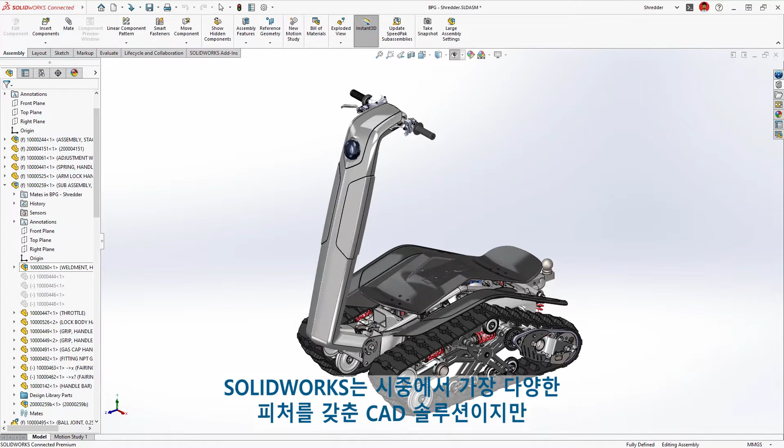SOLIDWORKS is the most feature-rich CAD solution available, but that doesn't mean significant improvements can't be made. In SOLIDWORKS 2023, we focused on expanding the capabilities of existing features to make you more productive.

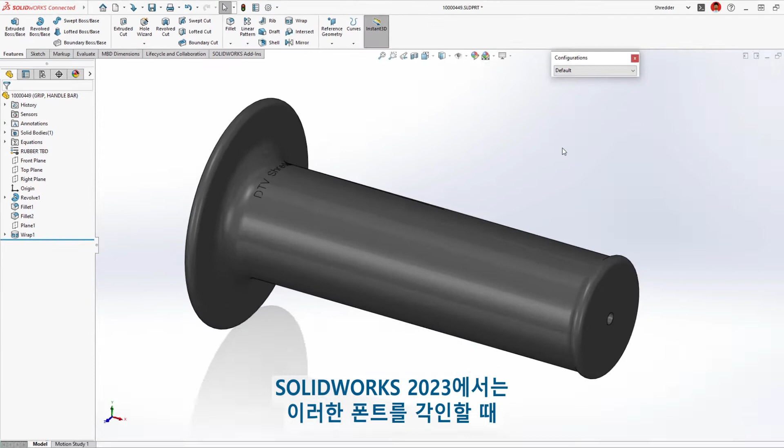Inscribing information such as serial number or model names into cylindrical surfaces is best done with single-line fonts. SOLIDWORKS 2023 allows you to inscribe these fonts using the wrap feature.

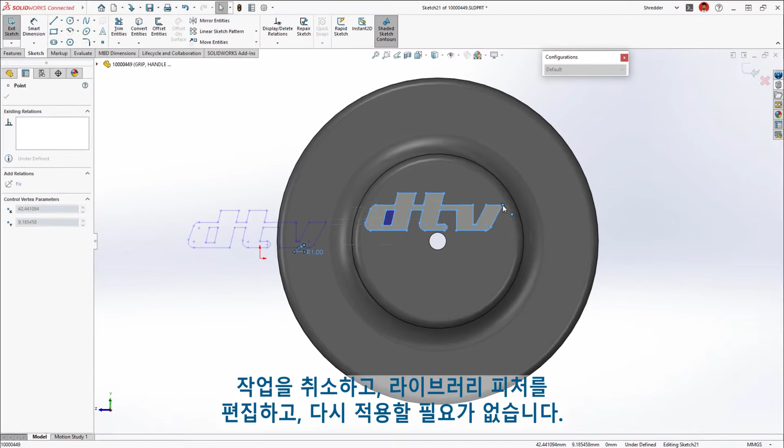Adding the DTV logo to the end of this handle is easy with library features, just drag and drop. However, in some situations, a reference may not be valid or otherwise broken. In 2023, you now have the option to keep the feature and solve the issue manually, rather than having to cancel the action, edit the library feature, and reapply.

This design is a good start, but the smooth surface may not provide enough grip for the rider. Let's create a pattern of ellipse-shaped bosses to give the rider confidence when traveling over even the most extreme terrain.

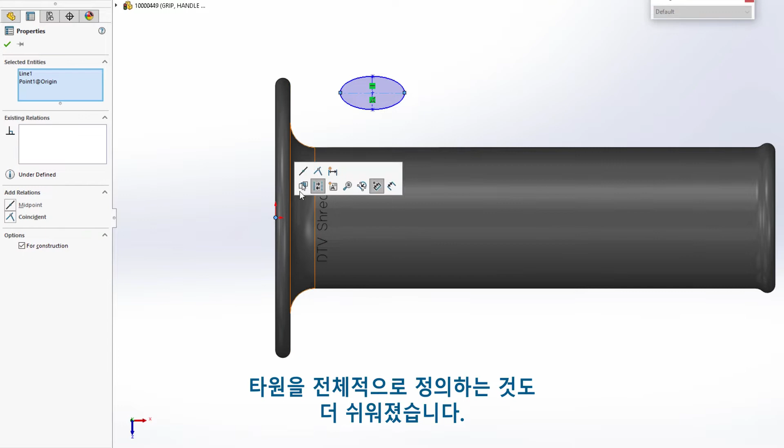In SOLIDWORKS 2023, you can now create ellipses with construction geometry, making orientation effortless by selecting a construction line, then choosing the appropriate relation. Fully defining the ellipse is now easier too, since you don't have to select multiple points to define the major and minor axes.

Creating an offset body is easy in SOLIDWORKS, but how far along the handle should we place it? Since we're creating a pattern of these bodies, it would be best to define the parameter based on a global variable that also defines the spacing of the instances.

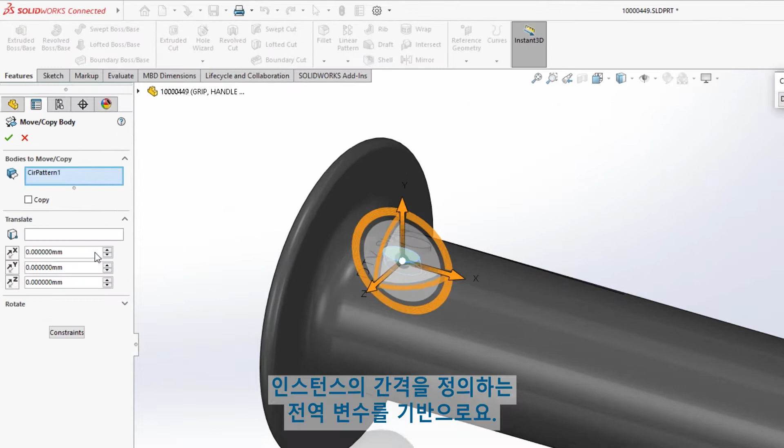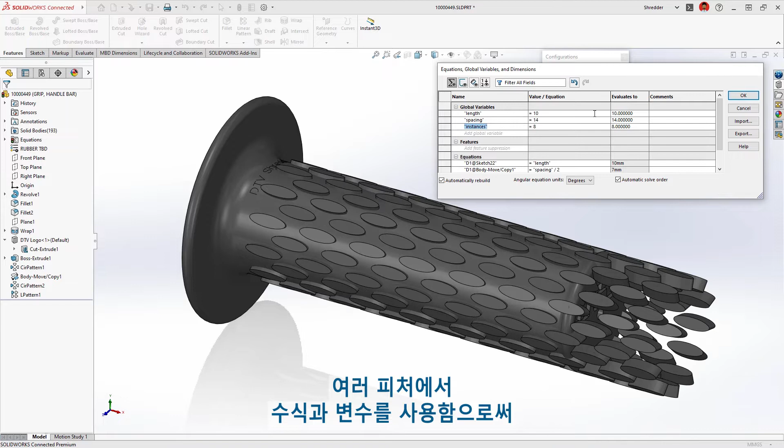In SOLIDWORKS 2023, the Move Copy Bodies command can now define translation and rotation of bodies with equations, even on a per configuration basis. A design like this tends to be iterative, so having convenient access to these parameters will save time. Using these equations and variables in several features allows us to make broad changes without having to edit each individual feature.

Finally, reducing part complexity and protecting intellectual property are a great use of the Defeature tool, but in some cases you may not want to create a whole new part that will need to be managed, stored, or otherwise lifecycle managed with a PDM system.

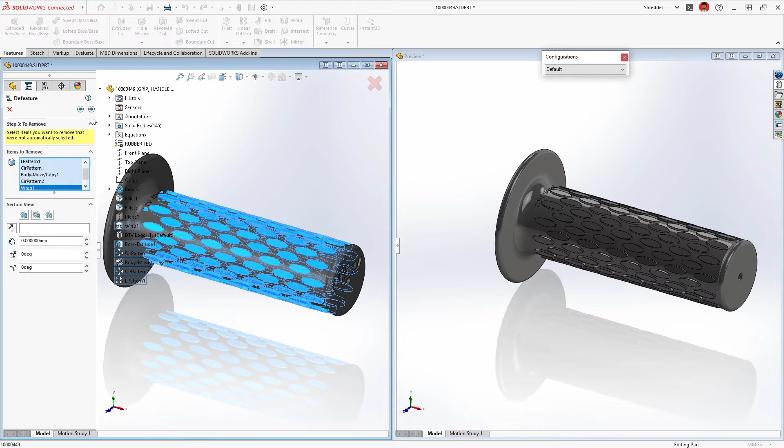SOLIDWORKS 2023 SP1 will allow you to create a configuration of your Defeature parts, which can be useful for creating simplified versions. And since it's a derived configuration, it will adopt changes made to its parent configuration. Also, replacing the complex version of this component in the assembly no longer requires selecting a new part file and reattaching mates. Simply select the configuration from the drop-down menu.

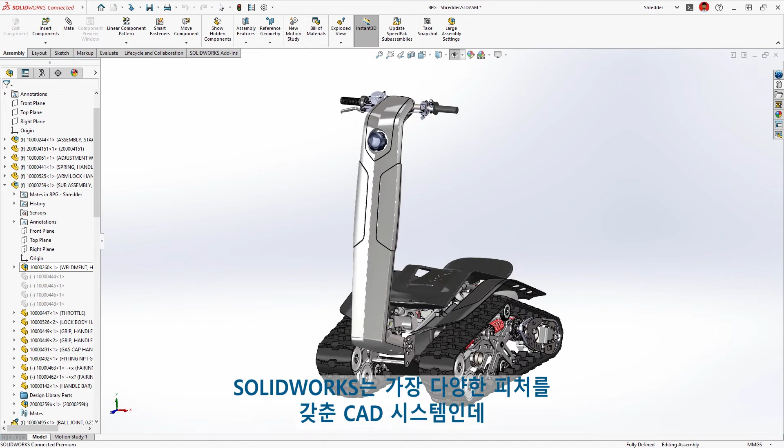SOLIDWORKS is the most feature-rich CAD system, and now those features are even better with this latest release. Whether you're sketching, inscribing text, or working with bodies, these tools are even more flexible, giving you more ways to increase your productivity than ever.